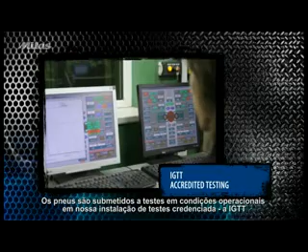We respect international standards. Mitas is a member of the European Tire and Rubber Manufacturers Association. We invest in research and development to make our tires long-lasting, fuel-efficient, and reliable. The process of developing a new tire, creating rubber compounds, and testing may take up to 4 years from conception to production. Tires undergo testing in operating conditions in our accredited testing facility, the IGTT. We insist on quality, effective production, employee expertise, and environmental protection.

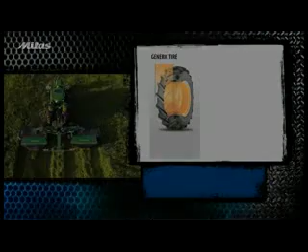Tires with new features. Super volume tires are made for power tractors of 200 horsepower or more. With super silent tires, we have managed to decrease noise levels in tractor cabins by 50%. When driving, the links between the tread blocks of the CR01 tires stabilize mobile cranes and even out tread wear.

An innovative tire tread compound and all-steel radial construction increase the casing durability of the ERL20. Agraterra is a flotation tire intended for trailers. Agraterra has a longer tire life and improved self-cleaning properties.

Production plants of Mitas. Mitas produces tires at 4 European factories. In the Czech Republic, our production plants are located in Otrokovice, Prague, and Zlín. In Serbia, the Mitas plant is located in Ruma. Since 2010, Mitas is also present in Iowa, in North America. Mitas has 3,000 committed employees. The total annual production capacity exceeds 100,000 tons.

Interesting facts about tires made by Mitas. The largest tire produced by Mitas has a diameter of 2.2 meters and features 38.5 kilometers of cord. The heaviest tire weighs 455 kilograms and contains 51.5 kilometers of cord. The fastest road tire is a motorcycle tire that allows speeds of up to 210 kilometers per hour. The fastest tire is an aircraft tire that allows speeds of up to 300 kilometers per hour.

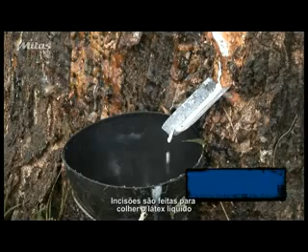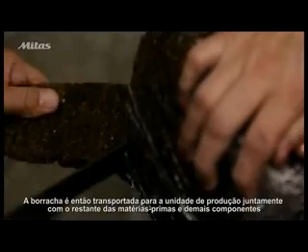8,000 kilometers from the heart of Europe, rubber trees are grown. Incisions are made to harvest the liquid latex. Natural rubber is the most important product obtained from the latex. Rubber is then transported to the production plant with the rest of the raw materials and components. In a laboratory, the quality and physical properties of the rubber are tested. If the sample complies with our stringent requirements, the batch is delivered to the mixing room.

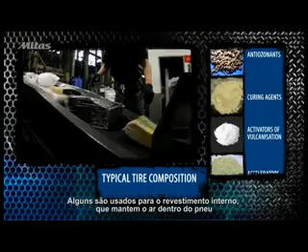Rubber compound mixing. The first stage of tire production is rubber compound mixing. At the rubber mill, the rubber is mixed with various materials. These include fillers, clay, and carbon black. At the last stage of mixing, sulfur and curing agents are added. The resulting compounds have various properties. Some are used for the inner liner, which holds air inside the tire, and others are wear resistant and are used to make the tread.

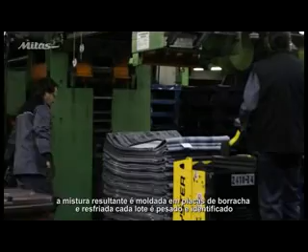In the laboratory, the density of cured samples and other physical and mechanical properties are measured. The resulting blend is formed into rubber sheets and cooled. Each batch is weighed and identified. After additional testing, the rubber compounds are used in further processing.

Next, we will show the basic components that make a tire. The components are produced during further processing. These are bead wires and rubber-coated cord. Other components are extruded and calendered from various rubber compounds. This animation displays the basic components of an agricultural tire.

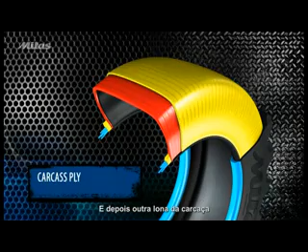The inner liner is used in tubeless tires. This is the first carcass ply. Then the bead core and bead wire. And then another carcass ply, bead lining, and rim strip.

These are belt plies. And finally, the sidewall and tread.

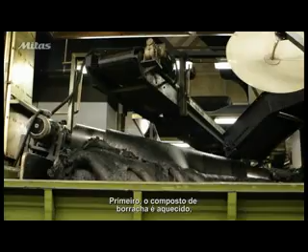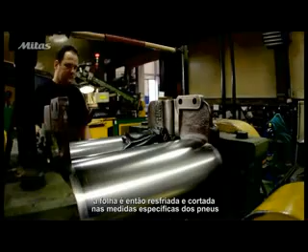Extruding and calendering of tire components. The mixed rubber compound is used for calendering the inner liner and extruding the tread and sidewall. First, the rubber compound is heated. Then the compound is put through extruder machines, where the tread and sidewalls are formed into required shapes. The extruders produce a continuous sheet of tread rubber. The sheet is then cooled and cut to specific tire lengths. The inner liner is produced by calendering.

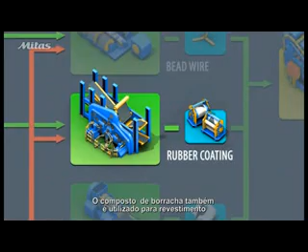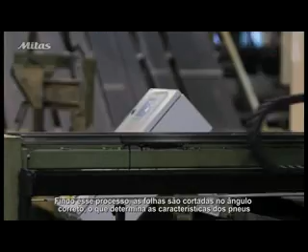Rubber coating. The mixed rubber compound is also used for rubber coating. Sheets of cord such as nylon, polyester, and steel are thinly coated with rubber on both sides. Once this is finished, the sheets are cut at the correct angle, which determines the tire's characteristics. These cut sheets are used for casing, belts, and other plies. Steel cords are mainly used for the belts placed under the tread and sometimes for the casing.

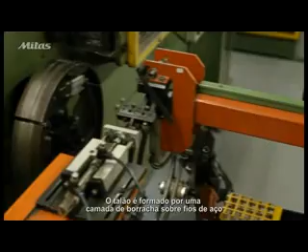Bead wire. Next, the bead wire is produced from rubber and steel. The bead core is formed by aligning and coating steel wires with rubber. Then, the wire is wound on a coil to form bead rings. The number of loops and shape of the bead wire are specific for each tire.

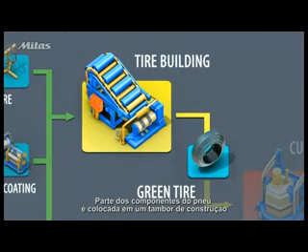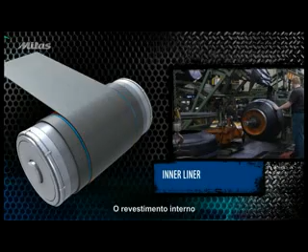Tire building. At this stage, all the tire components are assembled. The tire is made from components on a tire building drum. Tire building begins with the sidewall and rim strip. This is the bead lining, inner liner, and two carcass plies. Bead cores are placed on the building drum.

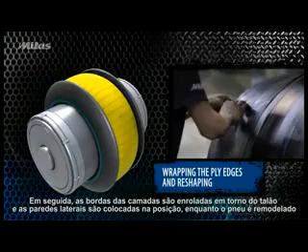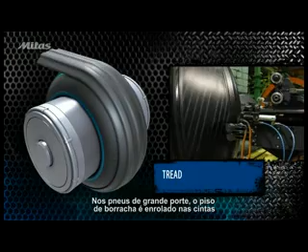Then the ply edges are wrapped around the bead core and the sidewalls are moved into position while the tire is reshaped. After inflation, the belts and tread rubber are applied. For large tires, the tread rubber is wound onto belt plies. This process achieves a green tire that already resembles the final product.

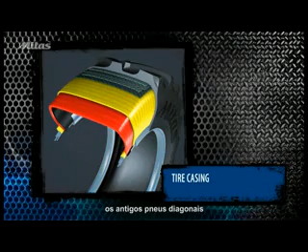The differences between radial and bias ply tires. There are two kinds of tires: older bias ply tires and newer radial ply tires. This animation highlights the tire casing. In a bias ply tire, the cord is laid at an angle of 60 degrees relative to the tire's movement. Successive plies are laid at opposing angles, forming a crisscross pattern.

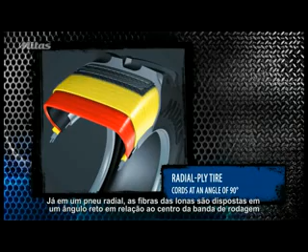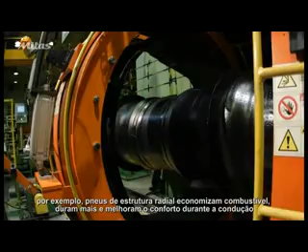Now, in the radial ply tire, the cord in the casing ply is laid at a right angle to the center of the tread. Radial ply tires are more complicated to produce, but they have new characteristics. For example, radial ply tires save fuel, last longer, and improve riding comfort. Agricultural radial tires apply less pressure on the soil and thus protect plant roots.

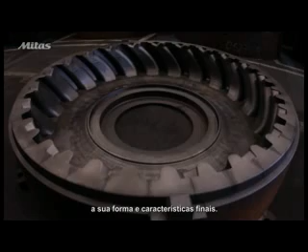Curing of the green tire. After tire building, green tires are cured in a process called vulcanization, in which the tire achieves its final shape and characteristics. This is a tire mold. Prior to curing, the green tire is covered with a solution that helps the green tire fill the mold. The green tire is placed in the curing press.

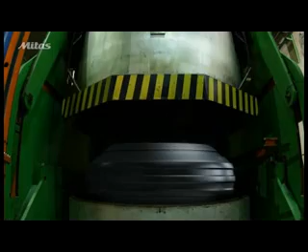The curing medium pushes the green tire into the mold. The rubber compound is heated and becomes plastic. It fills the mold. The vent system lets the excess air escape the mold so that the rubber fills the mold completely. The applied heat also initiates a process called vulcanization.

This is the basic element of the natural rubber molecule, a polymer. During vulcanization, these polymers are linked by sulfur. This changes the molecular structure into a three-dimensional pattern of interlinked polymers. The vulcanization of a passenger car tire takes only a few minutes. For an agricultural tire, this process can take up to 2 hours. This is a final product, a cured tire.

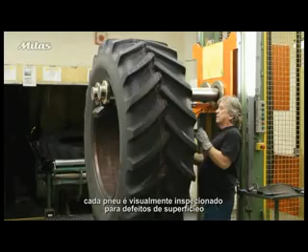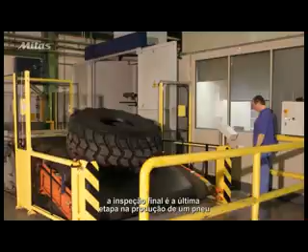Finishing and final inspection. Before the tire is dispatched from the plant, it is trimmed to order and inspected. Each tire is visually inspected for surface defects. Testing machines measure the compliance of radial and lateral runout with the norms. All tires undergo a uniformity test. Tires containing steel cords are inspected by X-ray for internal defects. The final inspection is the last stage of the tire production. The tire is then stored and ready to be dispatched to customers.

Mitas produces tires under 3 brands. These brands are Mitas, Continental, and Cultor. In total, we produce 1,500 various tire sizes and tire variants. From power tractor tires to tires for construction vehicles, from tires for use in speedway competitions to durable tires with a long life.